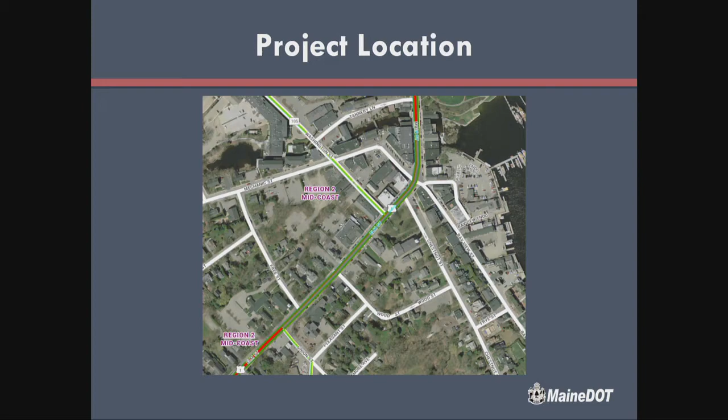And that expansion came in when we went together with multimodal. So there's, as you can see, it's not that long - only about a quarter of a mile, actually. But that just shows you the basic overview of where we're working right here.

Existing conditions, like we've said, drainage replacement. We're starting about 200 feet north of that intersection at Union Street. That last structure that we'll tie in, or replace, and then we work the drainage system going down downtown.

Basically, the existing conditions - a lot of these existing drainage structures are old brick basins. Typically they're square basins, about 24 inches square. And most of the pipe underneath the road, 18-inch metal pipe, over the years, it's just deteriorated, if it hasn't collapsed already.

Then with the sidewalk, especially on the easterly side, we're dealing with a mix of concrete sidewalk, with granite curb or asphalt curb, etc. - a whole mix of different things. We really want to make that consistent, and also match the sidewalk that was replaced on the west side of the road, to try to make that a little more symmetrical in a sense.

Guardrail - there is none on this segment. Usually, most highway projects we are dealing with guardrail. Fortunately, not in this case because we're in town.

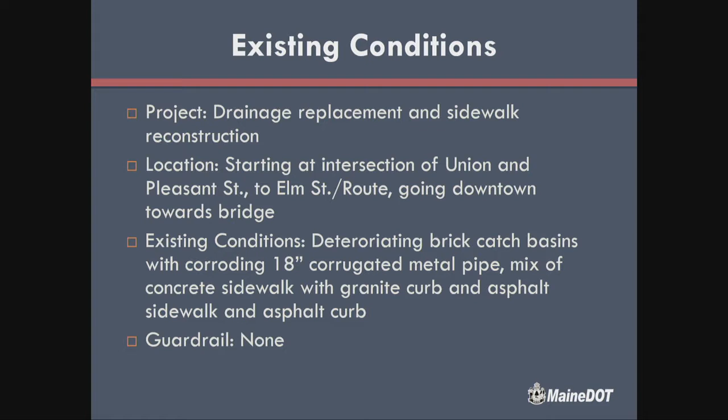Basic corridor information, what we're dealing with. This is a corridor priority 1 road. What that means, basically the way the department defines that is interstate, Route 1, Route 2 I believe going out Western Maine, and the airline, which is Route 9 going between Bangor and Calais. That's all corridor priority 1 roadway.

Speed limit down through the downtown, of course, is 25 miles an hour. A little slower than that once we get into season in a few weeks.

Current traffic, we're dealing with about 12,300 cars a day. Projected about 13,000, just over 13,000 by 2032. That's a projected number that we use.

Accident data - we have no high crash locations on Route 1. The one exception, it's technically not on Route 1, but on Chestnut Street, because on that one-way road, when the cars are backing back out into traffic with the diagonal parking, that's where we're getting a lot of accidents, or crashes I should say, there, but it's not specific on Route 1 itself.

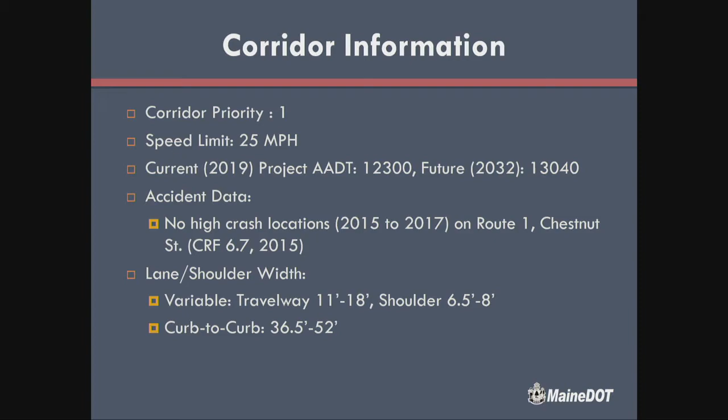Lane and shoulder width - when you look at the overview, you'd think this stretch of Elm Street is straight. It's not 100% straight through the right-of-way. So there is a section that does narrow up as narrow as 36.5 feet, and then it widens up to about 52 feet once we get closer to the 5-way intersection, closer to downtown.

Proposed drainage. Picture up here is the current outfall. Goes right underneath that building, about 24 inches wide in diameter. Goes right down underneath on the downstream side of that dam in the river right there. But that's the outfall currently.

When we're sizing this and designing this for the newer system, we need at least 36 inches. So it's completely undersized as it currently stands. Also going underneath the building - not exactly the best design in itself.

So what we want to do with the drainage is basically take the outfall, and the plan currently is to put a new 36-inch pipe down the alleyway, the harbor walkway, right through that corridor. Once we get to the bottom of the parking lot, take a 90, and then dump right into the harbor from right there - but with the proper size pipe.

Because of that, we're changing the location of the outfall. We do have to change the direction of the flow in some of these locations, but all of the drainage on that right side of the road will be replaced with new structures, new pipes, etc. So we're able to account for changing the flow path by doing that.

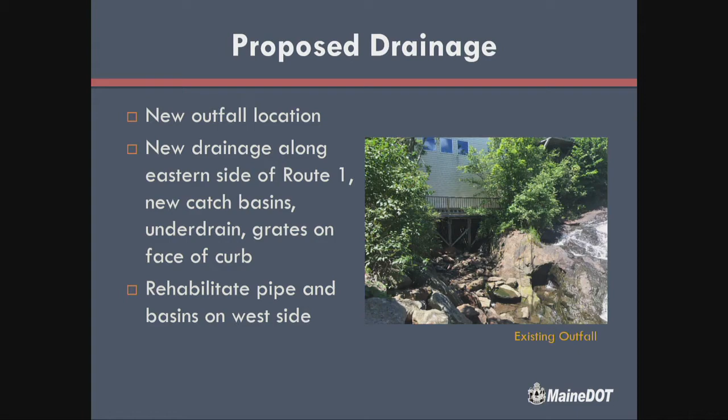Just to explain what a slip line is - there are different methods of doing that, but some of it's a folded up piece of material that goes in, and then it's pushed out, blown out, and there's grout that goes in. There are actual other systems where they grout inside of the pipe as well.

We'll be specifying that we want it slip lined, and we may be specific on what type we use, but it won't be proprietary - we may look at different systems that are offered up to do that. In other words, the existing pipe will remain and we'll basically line the inside of that pipe. The same procedure can happen, obviously with a different configuration for the catch basins themselves.

So what that does in this case is it allows us to not have to dig across Route 1 in the middle of town. That's what we're hoping. One of the big things about this is the condition of these pipes gets worse all the time, so we're trying as quickly as possible to get in here because the condition of the pipe now is such that we can do that.

If we wait and wait and wait, the condition of the pipe could get more deteriorated and worse, and be an issue where we'd have to excavate in the middle of the street.

The way we have to do things now with the Americans with Disabilities Act, we have to upgrade all of these pedestrian ramps at the end of the crosswalks. So while most of our sidewalk work is concentrated on the easterly side of the road, on the other side where the crosswalks are, we do have to upgrade with detectable warning fields and proper grade for the ramps coming back up.

I'm Italian, I talk with my hands.

So we have to do that accordingly and match basically what we have on the east side of the road. We have to maintain a minimum with new construction of 5 feet for the sidewalk. That actually widens out to about 10 feet wide in front of the village green.

The reason for that is because we want to keep the current trench with the drainage. A lot of these structures aren't on the curb, and with curbing and with the headers and the grates, we really want to line that up. Because the road's so wide, we're able to basically bump the curb out from where it currently is - it's narrowing up the road per se, but we want to keep that consistent.

So the way we were able to design this is to maintain a 14-foot travel lane. Currently we range anywhere between 11 to about 18 feet, so we're trying to keep that consistent.

We lay the curb consistent off the center line. The way the basins work, we can actually adjust and rotate them, so it looks like all the basins are straight, but we're able to rotate exactly where that grate's going to be while keeping that curb straight.

The other thing we're proposing at the intersection of Mechanic Street, given the existing conditions of the crosswalks and being able to utilize the Harbor Walkway as a pedestrian way, is to bump out the sidewalk, making it a little wider with a new radius. We'll reconfigure and move that crosswalk closer southerly to line it up with the Harbor Walkway and have that wider area.

The opening there in that street and crosswalk is about 85 or 90 feet wide currently. Typically when it's that wide, we really want to narrow it up, mostly for safety reasons. It also aligns everything and gives us a more continuous pedestrian path. We are also moving another crosswalk, the one down the road in front of Rite Aid.

That's a mid-block crosswalk. Our crosswalk policy says crosswalks can't be within 200 feet of each other, and because it's mid-block and Wood Street is just down the road, about 75 feet away, we'll relocate that crosswalk there. It's much better to have a crosswalk at an intersection than in a mid-block setting.

Are we supposed to wait until the end to ask questions? Yes, please.

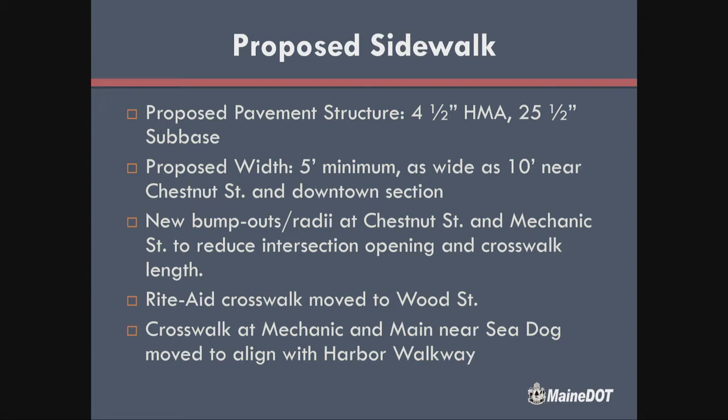Just to give you a general sense of what we're dealing with subsurface, this is a typical section of what we'd be doing. You can see the variable width of the sidewalk, which is on your right looking at this.

Basically, when we dig through the road, we'll take a saw cut and try not to disturb the road as much as possible, making that cut about 4 feet off the proposed curb. We'll dig that trench, put in the 18-inch under drain, which is what we'd use on that side of the road, and build up from there.

The variable widths and variable grades allow us to really play with and match into the existing conditions as best as possible, and establishing that range from a technical standpoint allows us to do that.

I'm going to try to zoom in here as well. This is where we're starting, on Union Street. That corner where the big tree is, that's where we would go and match.

These aren't totally updated plans because we're continuing that sidewalk down around Union Street on the other side of the school and wrapping around there. That's a brand new addition from the past week or so, about another 100 feet down to the next point. We're also waiting for formal survey data to draw that accurately.

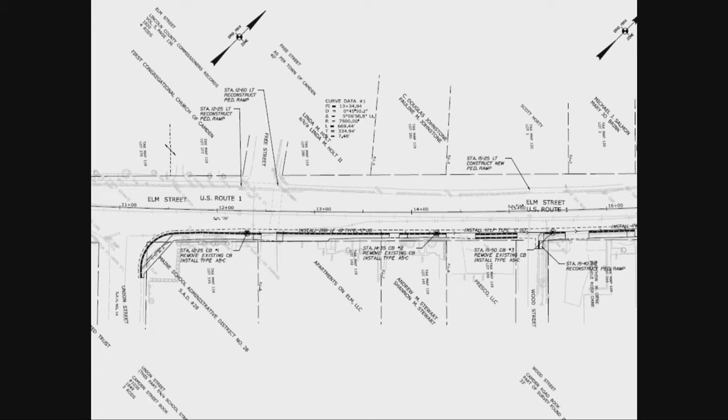We're going to address that as we go on, but I want you to take a close look at that now while that plan's up here, because that really impacts exactly what we can have on-street in regards to parking.

Let's go to the next page, further down, closer to downtown, same area, kind of focused on the five-way right here. This is obviously where it gets a little busier, a lot busier actually. This shows exactly how we come right down with that outfall pipe right down the alleyway.

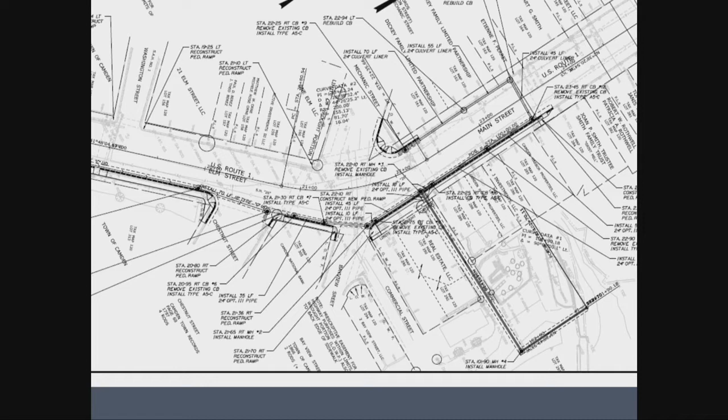To the parking lot, and then we take that 90 and dump right into the harbor. Also, if you notice here, wish I could zoom in and highlight this at the same time. Hold on, right here, this is what I was talking about exactly, where we have that bump out. Let me try to clear this. Will that clear? No, that worked. I like that.

You can faintly see where that existing edge of sidewalk is. We will bump that right out, allowing us a little more space. The master plan had a lot more of these bump outs.

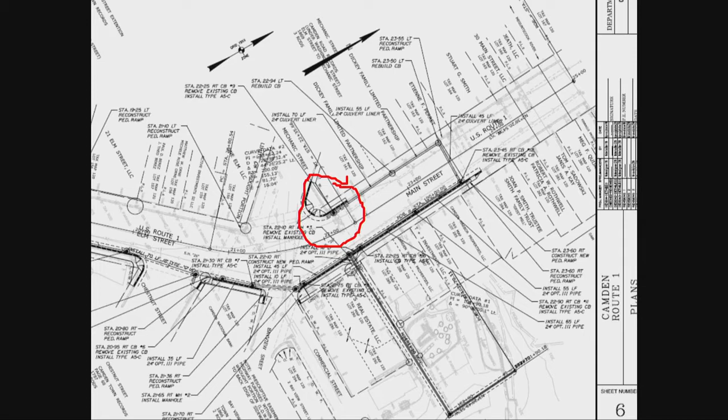We had concerns mostly from Public Works. They're very difficult to maintain in regards to plowing. When you have plows coming right down the curb line, then you have to come back in. When you have a radius like this, that's a little easier to navigate with a plow.

Did you say there was one at Chestnut too? Yes, right down, let me see if I can do this. We'll circle that right there. Not as big about that. There we go.

All right, under control. Is this online somewhere? If we wanted to follow along. Being taped? Yep, no, the plans - so she can see online. Not right now. Yeah, it's really hard to see. It's really similar to what's there.

It does bump that out slightly, mostly because we want to come in and back. We don't really want to change it, because that's a town way, so we don't have the jurisdiction to make that modification on Chestnut Street in regards to the parking.

We do have a full set of plans up here in front that you can look at. Would they be less? Yes. It's just really hard to know what you're talking about when you're seeing this for the first time. No, I understand. You have a laser pointer? I do not, we have one somewhere, right?

Jay, you want to go, let's run through the drainage portion. Yep, if you would please. Let's see, okay. So it's the same thing - that dark line, as you can see right there, that would be the outfall right there.

That's why we'd put a manhole or structure right there, to change directions with a pipe. We come right straight down that alleyway.

Piping, new piping on this side? Yep, all new piping on that side. Mostly because we have to change the direction of flow in that stretch. Currently it flows down with the outfall. The outfall currently, if you go to that top basin, right there, that's currently where the outfall is. So it goes from the location of that structure underneath the building into the river there.

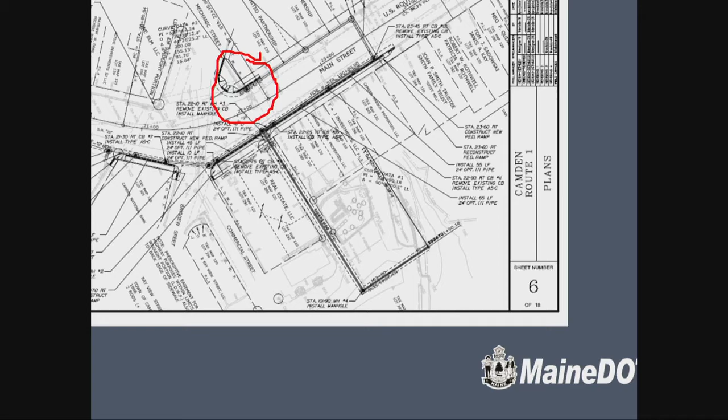That dictates exactly where we will be slip lining, putting that liner in to rehabilitate the pipe across the road. We want to do that so we're not disturbing Route 1 and totally cutting through. Same thing with the existing conditions of those pipes, we're able to rehabilitate those structures. We would replace the structure, that catch basin, in the area of the bump out. The condition of that is to the point where we can't rehabilitate it.

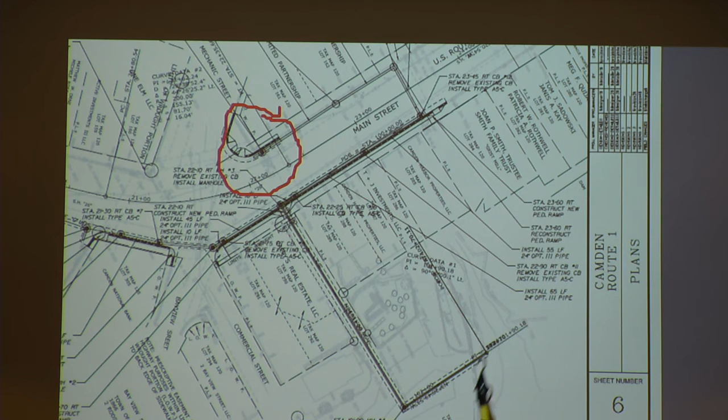Jeff Scott: are you redoing the surface of the alley there then? We would match what it looks like, so we'd match the existing grade of that. Same thing with ADA - to totally upgrade it is difficult because of the grade. So in order for us to go through there, we have to match what's existing. Matching the existing conditions allows us to excavate and put the pipe in.

Deb Dodge: I have more questions about the harbor walkway. Do you want me to hold them till the very end? Yes, please. All right.

So as we go through here with construction, to address the disturbance involved, we would have to shift traffic. A lot of these types of projects where we're coming through an in-town section, we might be able to reduce down to one lane, but because there's no feasible detour through Camden, we have to maintain the 2 lanes of traffic.

What we would propose, and let me reiterate, traffic control plans are determined by the contractor itself. We approve them, but it's up to the contractor exactly what they're going to do. We establish that we need to maintain, for example, 2 12-foot lanes, which is what we would do in this case. Then the contractor would set up the lane shift, etc.

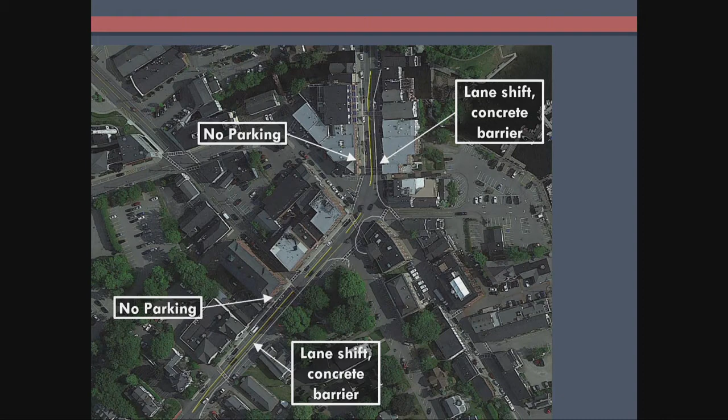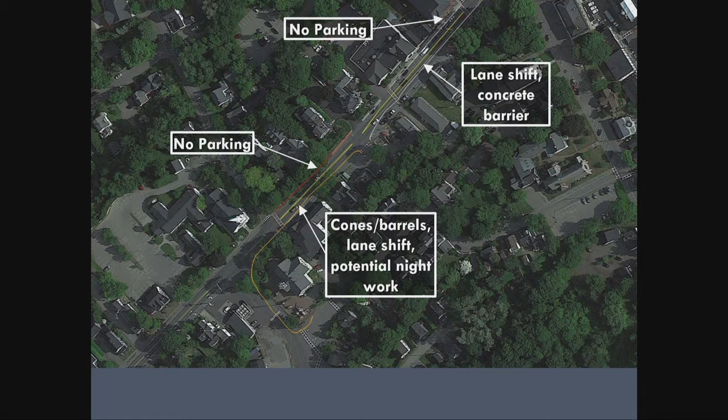And similarly, the area between Union Street and Wood Street, where it's so narrow, we're getting down to about 36 feet curb to curb - that may have to go nights, for example, just to maintain traffic and a feasible path and work zone. It would be more cones and barrels to get through that section. We may have to go nights.

Potentially, the on-street parking in the areas of the work zone won't be available during construction, because we have to keep the 2 lanes running. There'll be concrete barriers up, probably in the in-town sections. Once you start up Elm Street, maybe we can get away from the concrete barriers to a degree and just cone areas off.

We'll maintain pedestrian traffic at all times, though it will be reduced down to probably 3 feet wide right in town. Jay's got some slides on that, we'll talk about it. But everybody needs to know that when you do one of these projects, especially in-town ones, it's almost like renovating your house and living in it at the same time.

Can you clarify the dates that you're doing this? Yeah, we'll talk about schedule.

When Doug mentions the 3 feet, that's only right in that in-town section. In the areas south of Camden National Bank and Chestnut Street, because we're going from asphalt to concrete, we wouldn't be able to totally maintain that at times, so we would detour pedestrians around. Think of the crew kind of moving up the road - that's where the road's closed, but you can move around it.

So going with the sidewalk barriers, again, how it's actually done is determined by the contractor, we just approve it. To give a few examples, when you're looking at a major city doing building construction, they'll either have a canopy so things aren't falling on the sidewalk, making it look like you're walking through a tunnel on the street. Obviously that wouldn't be necessary here. Or they'd try to channel pedestrians more into the street. We wouldn't do that here; we'd try to maintain the sidewalk as best as possible. But just to give a few options, whether it's the fencing...

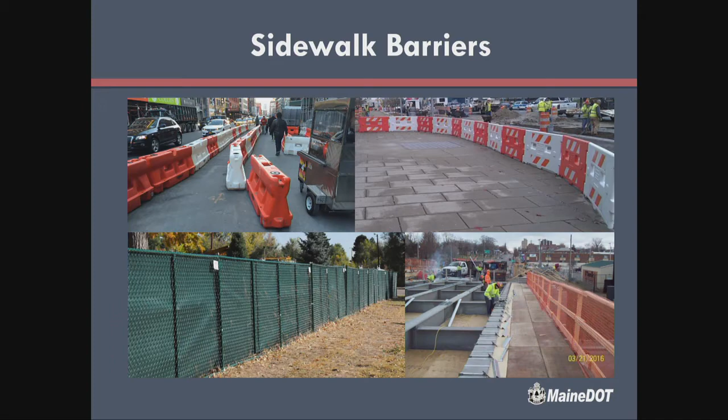Basically we have this wood frame safety fence, 42 inches high. That's another option. Or we have the plastic barriers. Basically it's up to the contractor to make sure they're able to maintain that 3 feet, as well as having enough room for them to work. So it's their preference. Obviously something a little narrower benefits everyone, and again it's up to the contractor to determine what they use.

In town, envision being able to—if you look at the sidewalk down there, there's a construction joint in the middle. Probably we'd maintain that construction joint where it is, sliding over about a foot or so toward the roadway, cutting a line down through there and establishing something for a fence line down that side. Then, of course, out on the roadside, that would be all concrete barriers. So trying to keep people separated, you'd probably have a fence similar to that, at least 42 inches high plus a bit above, to keep people from getting into the excavation area. But at the same time, being able to maintain access to enter all the businesses down there and so on.

Budget and schedule. Schedule. That is me.

Currently the project is funded with all state and local funds. The current estimate for the project, including preliminary engineering, right-of-way acquisition, construction, and construction engineering, is $1,168,000. As for schedule, right now we're hopefully looking at advertising for bid in the second quarter of 2020, with construction beginning in the third quarter of 2020, with no work between Memorial Day and Labor Day during the summer rush period. That's what we're looking at right now.

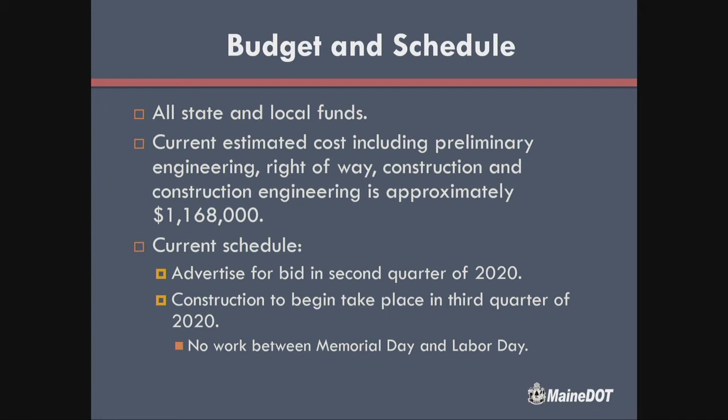It would be a tight schedule for the contractor in some ways, but it's the best period of time to try to get down here and do that kind of work. Luckily it's relatively small areas, and as Jay was talking about, it can be more segmented and phased as much as possible.

Obviously the outfall pipe is a challenge. There's bedrock almost at the top of the ground where we're going through down there. Right now, talking with our construction folks back and forth, blasting's kind of out of the realm. What would basically happen in that area is probably a contractor would drill a series of holes, making it almost like Swiss cheese, then go down there with some type of hydraulic hammer on an excavator and break the rock and take it out. That's a slow process, as you can imagine, but it's also a process that can be done during the wintertime because it doesn't matter whether it's cold or hot—you can drill that rock, the rock's not going to freeze. So that's what we're looking at in that particular area.

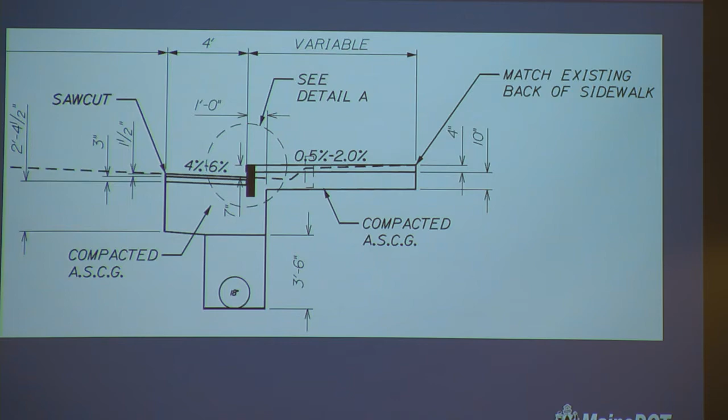Another question, a little risky one, really directed to Rick and Audra, is whether Tannery Lane is truly a public way or whether that could have a one-way detour for part of the traffic, say coming from the north. I don't know, it was just trying to look at a creative solution, but it's got other complications.

We have looked at detours, and I actually rode around before the meeting a little bit, thinking that's what we did in the city of Hallowell. Obviously, there was one-way traffic there. We shipped them down one street because we had two really good parallel streets. I did ride around here a little bit before the meeting this afternoon, and I think there's some challenges there to trying to detour traffic. The streets are very narrow and residential, and you're talking tractor trailers and big trucks and things like that. So I think there's some real challenges with that.

That's why we want to try to maintain 2 lanes of traffic out there at all times. It will be tight, but I think that's a better alternative for this project.

Pauline Johnstone: How were you proposing to deal with the narrow section of Elm Street? That was the section Jay was talking about that would probably have to be done at night because it's going to have to go down to one lane of traffic. There's no way we can keep 2 lanes of traffic going in that area and still have 22 feet, 11 feet for each travel lane. So there'd be a section that we'd require the contractor to do at night, and that would be that section. Luckily, it's a relatively short section, which is good.

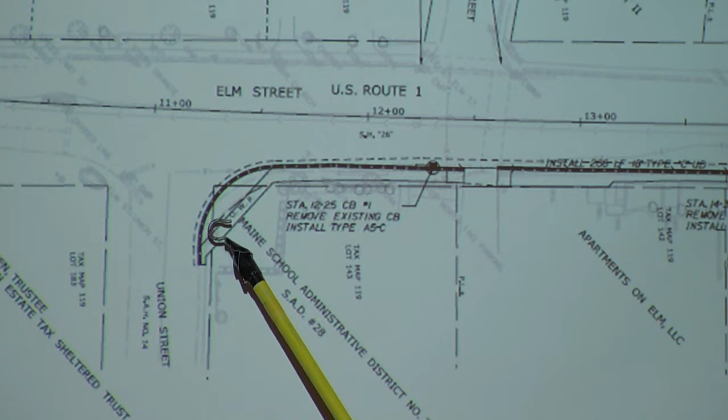So we would do just that. We'd basically thread the needle, going off preliminary survey measurements that Doug and I took, without the formal survey data returned to us at this point. We're able to thread that needle with the appropriate 5-foot minimum width, then come along that back side of the tree to the existing asphalt sidewalk and match into there, continuing towards Pleasant Street.

That has been a consistent problem, as you're probably aware, with people parking, pulling right up over the sloped asphalt curb. It's not really a curb, so in order to maintain safe pedestrian access, we need to make it harder for people to pull up onto that walkway.

Are you planning to do a concrete curb there? Concrete with granite, yep. Thank you. Exactly.

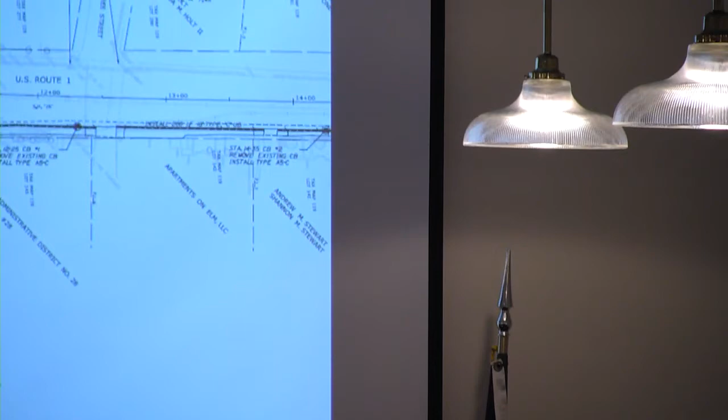One thing I do want to point out: putting this hard surface across here is also over the roots of that tree, which makes it a little more vulnerable, because if you look at the canopy of that tree, assuming the roots extend out the same amount, a fair amount of that's already under the pavement now, and then we'll turn around and put something on top of it. We agree that's the best place for that sidewalk to go, between the tree and the stone monument, but that is certainly something that makes the tree more subject to not being able to survive.

With that concrete surface, the excavation and base underneath goes down to about 14 inches below the proposed surface of that concrete sidewalk -- we take 10 inches of gravel, and the concrete itself is 4 inches thick. So it'd only be about 14 inches of excavation in itself. But where the top of those roots lie, that's the biggest question. Yeah, we tried to look at that and keep it up as high as we can, realistically.

Exactly, we don't want to trap water in there. That's the other issue -- the more you bring that sidewalk up, the more chances to trap water. We looked at it, and water tends to want to run around that monument and then out across the lawn. So that's going to be a challenge in that area, because we're even adding more soil. If we jack it up, it's adding more soil over the top of the tree roots. Is that worse? That's what I was thinking, sort of turnpike it a little bit. So yeah, I'm pointing that out at this point.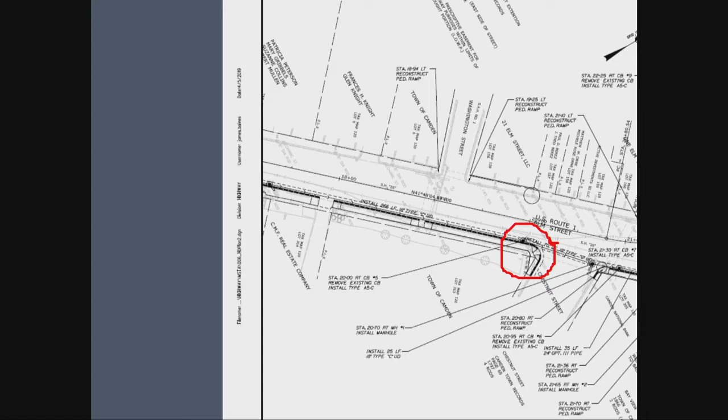Basically, is the sidewalk always the same width, pretty much? Well, in this case, we want to keep the travel way the same width, and we really want to make sure that the curb and the basins line up accordingly. So we establish where the curb is going to be in more of a straight line with the drainage to keep the travel way one consistent width. By doing that, we're actually able to widen the sidewalk, holding the back edge of the sidewalk. So currently the variation is in the travel way - got it. This way we're moving that to the sidewalk, which is a little more advantageous for a busier pedestrian way.

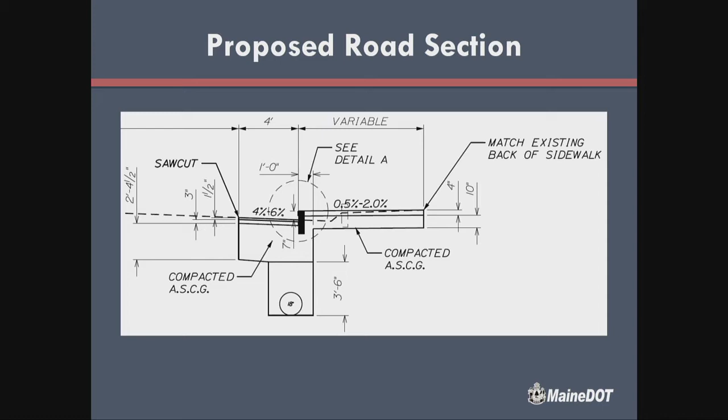Jay, go to your section. Yep, typical section - it shows it in the typical section, actually. Here's the new granite here, there's existing here, so it's widened out. This sidewalk would be widened in that particular area, as shown where this typical section is. In other words, we're trying to keep these lined up so the catch basins are actually running on the gutter lines, and then varying the sidewalk, holding the back edge of where the sidewalk is now. So then you get a varying width of the sidewalk itself.

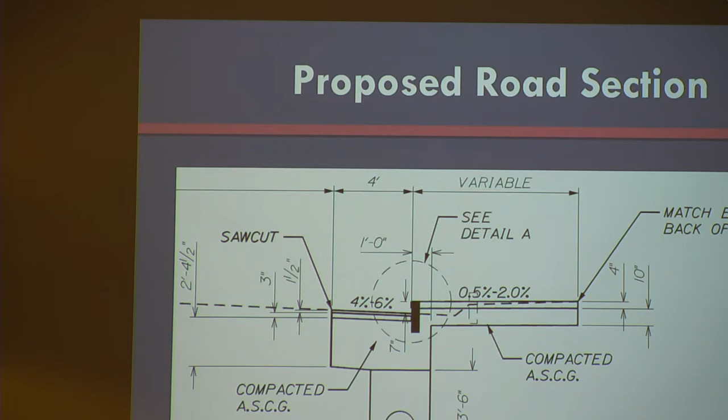Also, bearing on what Andrew was saying, moving to another question, you had talked about trying to reduce the distance across Route 1 to Mechanic Street by doing a little bump out there. But I think you're going southbound, also on Route 1, with the drainage, and you're going right underneath other areas that were recommended as having bump outs too, particularly across Chestnut. And I think you said you're reticent to do that because that's not a state road, Chestnut, and so you didn't want to do the bump out there, but what you're going to do is going to have to be redone.

To answer specifically to Chestnut Street here, the left red circle. Yes, that circle. It's a good circle, not bad freehand.

Anyway, we would reduce that to bring to ADA standards and make sure that we have a clear path on the backside of that ramp so a chair can actually maneuver around and through. If, let's say, a chair wants to come from Chestnut Street around that corner up Elm Street, they're able to do that without going into that ramp down to the crosswalk. And with the angled parking there, we're actually able to bump that out and actually narrow that intersection, not to the extent of going all the way down Chestnut Street, because that is a town way.

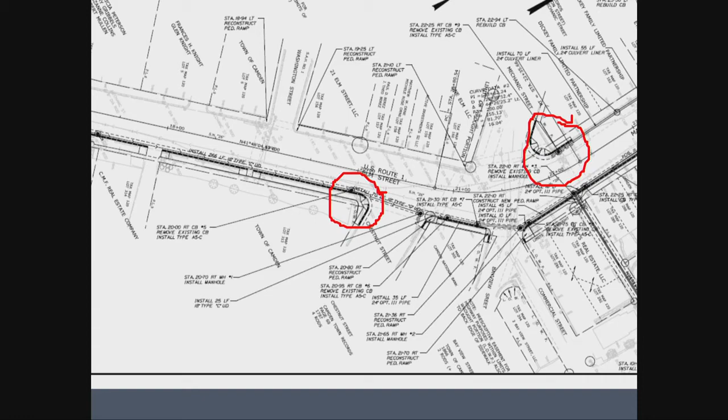And I know, Rick, it's harder for plowing. Yeah, I don't know, it's a tough one, but I think overall, on balance, the bump outs would be - I agree with the committee that came up with the design - a better decision than not to.

Rick Seibel: On the bump out, one thing to consider is that when they come out like that, you have to reconsider the drainage and locations of the catch basins, because the bump outs will stop the water from flowing to a catch basin if it's on the wrong side. So they may have to add extra catch basins on either side of the bump outs you want to propose, which would increase the cost of the project.

Deb Dodge: So the reason we're not doing a bump out on the end of Chestnut Street, I'm looking at a catch basin right by the Camden National Bank. Yep, so that is what Rick is referring to, that the placement of that catch basin precludes an extension of the sidewalk in that area, specifically with the heated sidewalk, to maintain that or not disturb it at all. We'll have to disturb it to put in the new structures for the basins, regardless.

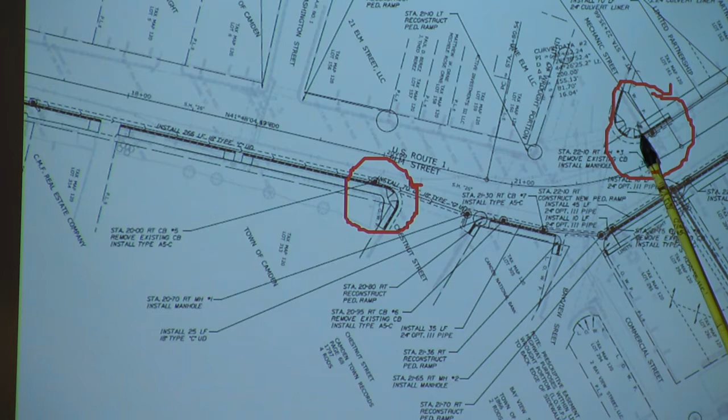Yes. I mean, that's not great, people love that parking spot. Can you go over the reasoning for that again? Pedestrian safety primarily, narrowing that crosswalk, the length of what a pedestrian has to cross. That's a tough intersection if you're a pedestrian. I mean, I know, I am a pedestrian walking with kids all the time across 3 lanes. I do see the issue. I just think that many people probably believe that the benefits outweigh the downfalls.

You could move the 15-minute spot around the corner on Mechanic Street. I just think that's possibly one of those things that to anybody who's a professional who designs these types of things makes all the sense in the world. But it's sort of like our Mechanic Street parking lot that we just went through this big thing with. Following all the correct design principles is not always popular with the people who actually use it. And I tend to think this might be one of those cases. I think some of it too was about the ADA, giving people, particularly with a wheelchair, the ability to traverse that area as well, with some of the bump out design considerations regarding grades and cross slopes.

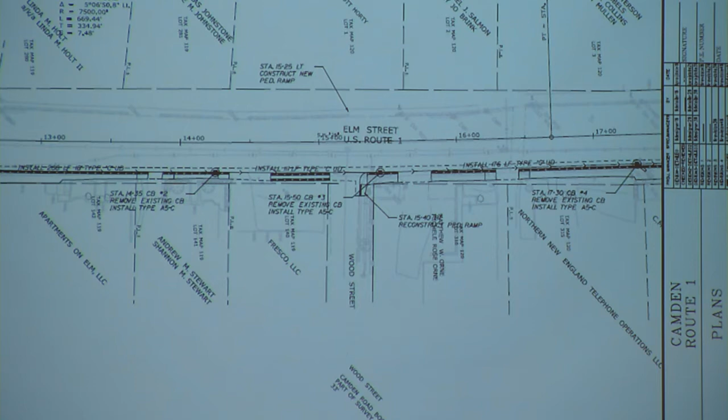Basically, we would build in that opening, that wide opening where there's no curbing, any of our drainage, any of the water is going to cascade right across that driveway. To close up that driveway, we would build a 5-foot sidewalk, basically like an island, but it actually would be a sidewalk. Narrow, short enough to keep the maximum width to get in and out of that driveway, yet also able to provide an actual channel, a pathway for pedestrians. The curb also helps us with the drainage and having that gutter line, and that's pretty crucial from a drainage perspective. Right here. Yes, right there.

Yeah, there will be an impact to a business or two there with parking, and a lot of people pull into the smoothie shack. I'm not saying that shouldn't happen, but I'm trying to understand how I can explain it. Has there been a discussion with the property owner there?

Doesn't that actually add parking on the street side? Oh right, yes, I guess maybe that would, yeah. Okay, still greater than zero. Your eyes must be much better, I have a hard time looking at this. I also looked at it. Oh, you looked at it, okay. I looked at the small version. All right, because I really can't see much.

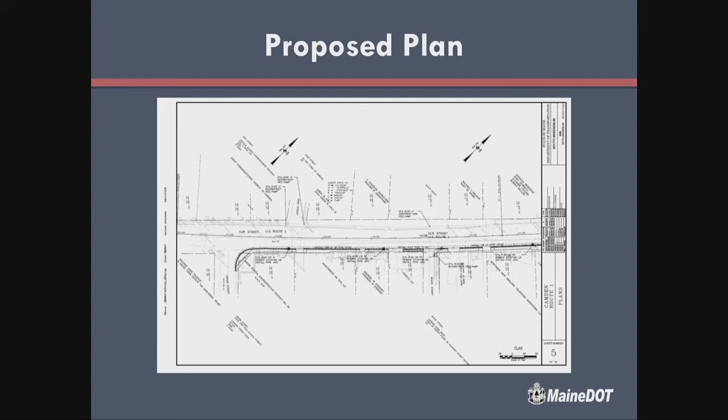Jeff Scott, going back to the corner there, and just extending 100 feet down Route 1. That section has a mess of trees that split the school off, right at their fence line, in or out of the fence. Are you going to try to preserve those? In other words, if you're making the sidewalk a little wider there, or are you going to stick with the back edge of the sidewalk where it currently is? I think the trees are right there along whole there. The idea throughout the project is to keep that in, hold that back edge of sidewalk.

Okay, just because knowing if we do have some sort of cross slope and it does pitch out towards the street, we're able to maintain that elevation and get the appropriate cross slope that we need. Because we drain the sidewalk into the gutter line on the curb.

I guess you guys will be back as these plans develop any further? Yeah, we can come back and have conversations. We'd pretty much like to do it with the town itself, if we could.

We typically, on these type of projects, do basically one public meeting such as this to gather as much information as we can, and then we pretty much go back and talk with the town officials from that point forward. The reason I ask is I have some questions about sign placement.

One of the things our team is working on is we just walked Elm Street, looking at current existing signs and proposed signs as they are in the master plan, and how they work together or don't. At this intersection of Union Street and Elm Street, there's a cluster, particularly if you're standing up at the stop and go and look down, of signs, trees, and poles. And further down, there's a 105 junction sign.

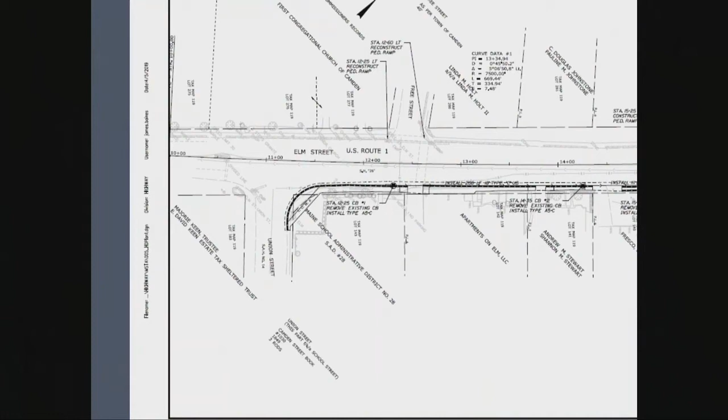All right. Any other questions? All right, if there's not, I think we can come to a close here.

We typically accept comments for a couple weeks from this meeting. As I said, I have comment papers right up here, my cards are up here - feel free to take them. Email me. I make sure that RL and Jay get copied on everything that comes in so we can keep track of what's going on with the comments.

After the comment period, we'll be moving towards final design. We're at preliminary design now. We'll be submitting our preliminary design report for approval with the department management folks, and then we'll be working with Luther's group on acquiring any rights that need to be taken, and the process moves on from there.